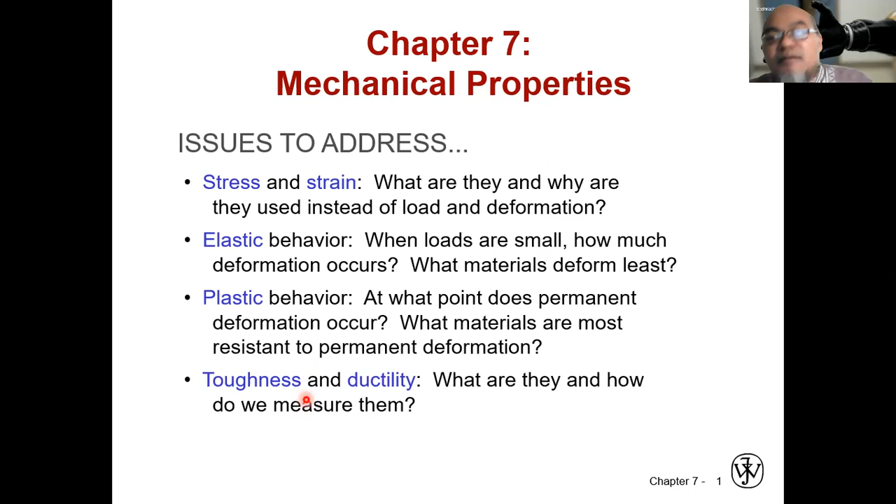What are stress and strain? Usually they are related. Why are they used instead of load and deformation of the material? Then elastic behavior of material: elasticity, or modulus of elasticity, or Young's modulus. When loads are small, how much deformation occurs? What materials will deform the least? Plastic behavior: at what point does permanent deformation occur, and what materials are most resistant to permanent deformation? Then toughness and ductility: what are they and how do we measure them? There are actually many other mechanical properties; we will discuss them one by one.

Whenever we have a material, let's say in the form of a solid bar like this, if we zoom in to a few nanometers or several angstroms, we can see how the atoms are arranged in the crystalline structure, for example a metal in its crystalline state. When we apply loading, this horizontal bar represents the bottom surface of the bar. Applying mechanical loading means we apply force to this bar, with one end fixed, either pushing it or pulling it. Pulling means elongating the bar downwards to make it stretch.

When we speak about elastic deformation, the elastic region of deformation, it means that the deformation has to be reversible. What does it mean? When we apply a stretching force, stress, to the bar, or a pushing stress, the bar will deform. Deformation means that the material will change its shape.

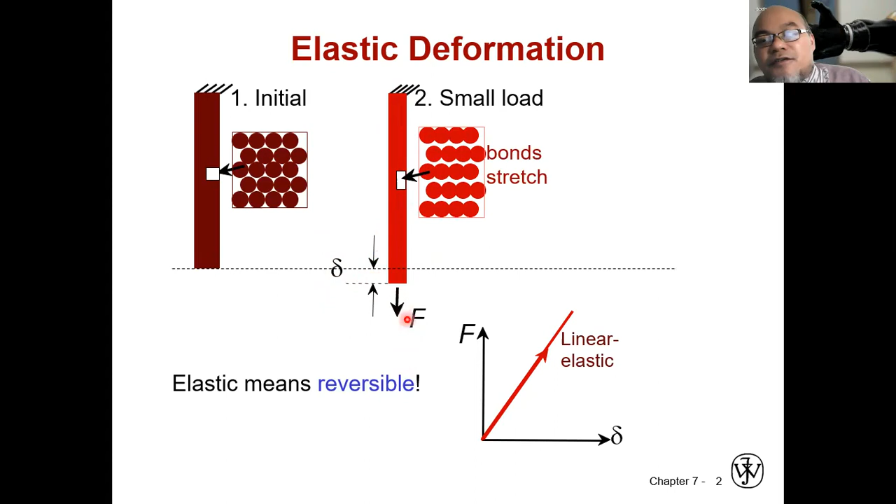So when we apply a small load like this, the bar will stretch with an elongation of delta. Delta is the extension length, with a force F. In this case, the bonds between the atoms are stretching, so there is more space between the crystalline planes, parallel or perpendicular to the force.

So here, when we draw a graph of force as a function of delta, as a function of the extension, we will have a linear elastic graph. As long as it is still in elastic deformation, the graph should be linear.

So when the force is released, the process we call unloading the force, when it is elastic deformation, the material should come back to its original shape. And so the bottom part should come back to its original initial position.

Okay, however, some materials also have nonlinear elasticity. Nonlinear elasticity means that they can still come back when they are stretched. When the force is applied to that material, they will stretch, and when the force is released, they will come back to their original condition. However, for some of these materials the curve of force versus delta is nonlinear.

Most solid materials, like crystalline state materials, like metal, usually have a linear elastic graph of force as a function of delta.

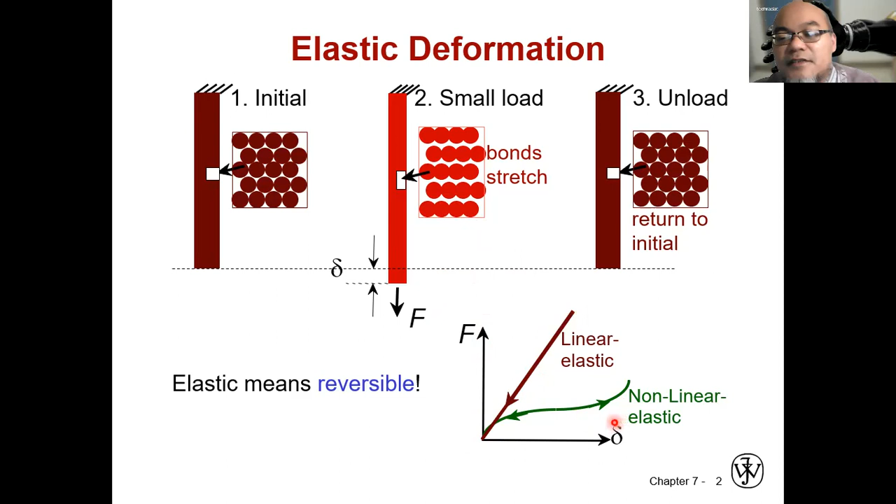Okay, then plastic deformation, on the other hand, happens when you pull that vertical bar of material above its linear region, or beyond its elastic region. Then slip will occur between the crystalline planes here. The bonds stretch, but not only stretch. Remember the stacking planes, A, B, C, A, B, C, or A, B, A, B, with face-centered cubic or hexagonal close-packed materials.

Okay, then it will shear from one plane to another. If that material is further stretched, further pulled by that force beyond its elastic deformation region, then it will not be elastic anymore. So if we further extend this material, the relationship between the force and the delta, the extension, is not linear anymore.

Then after the load force is released, that material cannot come back to its original shape. Why? While the bond stretching will be relaxed, so that the distance between the planes will decrease again, the shear between the planes still exists. This is something which is irreversible, when you have already pulled that material into the plastic region.

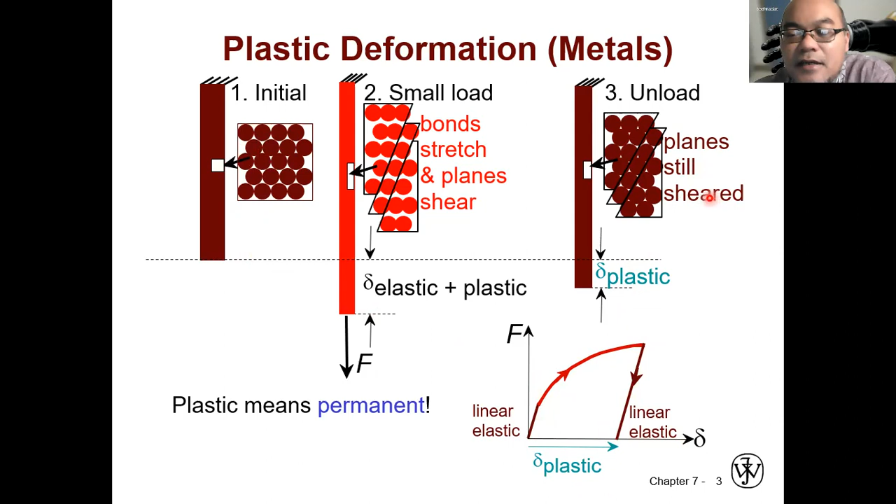So the delta is not zero as in its original initial condition. Instead, it will have this delta plastic caused by the shearing between the crystalline planes of that material.

Okay, so we are speaking about force, force loading. In material characterization, normally we don't really speak about force. What we speak about more is the stress applied to that material. Why do we speak about stress rather than force?

Because when you speak about force, let's say 5 Newton or 10 Newton, even if you apply the same force to different vertical bars, the effect will be different if one of the bars has a smaller area compared to the second bar. It means that this engineering parameter has to be normalized against the area. So mechanical scientists came up with this engineering stress parameter.

So when the material is axially pulled, the two opposite surfaces are moved away from each other with a perpendicular force Ft like this, and the cross-section area is A0, then it will endure an axial stress sigma, that can be calculated as equal to the tensile force. We call it tensile if it is pulling, making the two ends of that material move away from each other.

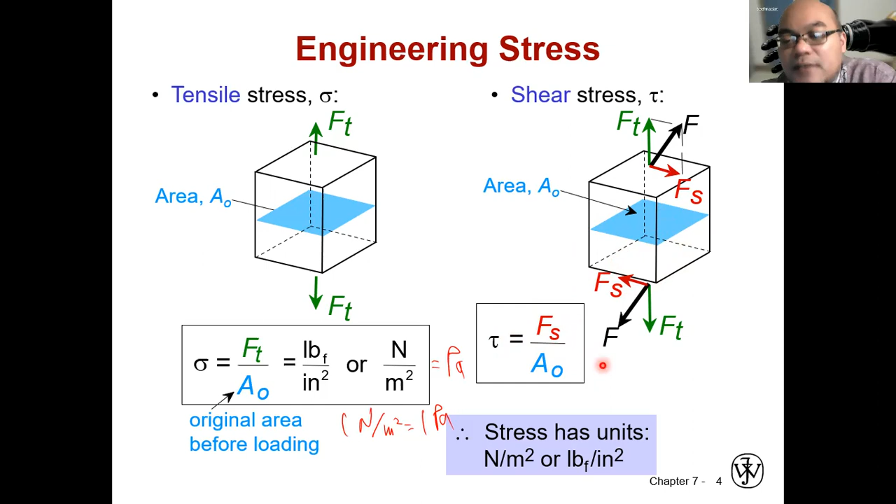So due to the existence of this Fs, we also have what we call shear stress, with the symbol tau. The tensile stress usually is symbolized as sigma, while shear stress is symbolized with tau. The formula also looks similar; the only difference is instead of Ft, tensile force, we put Fs, shear force, in the formula. So tau, the shear stress, is equal to Fs divided by A0, the original area before the loading. The unit is also the same, Newton per square meter or pound per square inch.

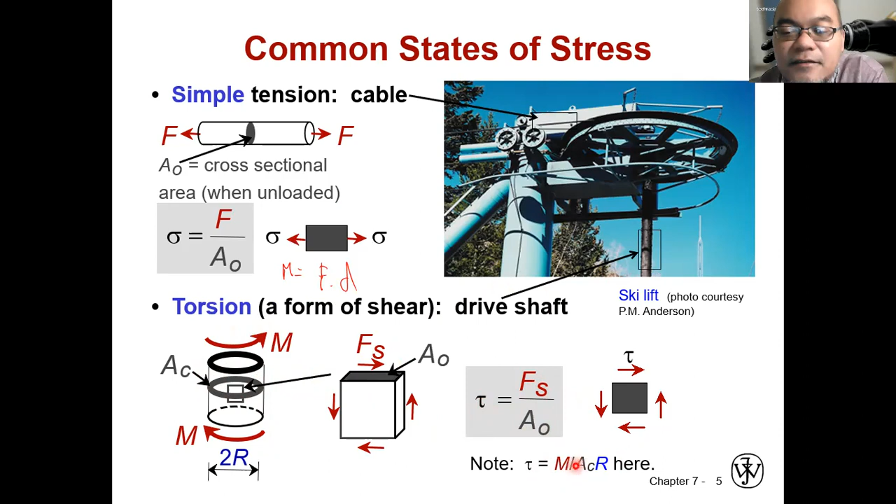So here the d is the r, the radius from the center of this shaft, the drive shaft, to the edge, to the circumference of the drive shaft. So Fs is replaced by M divided by r. So here then tau will be equal to M, the moment, divided by AC. AC here is the circumference area, divided by r, the radius. Okay.

So stress occurs everywhere. For example, here we have a balanced rock, this is in Arches National Park, I think in the US, but we also have many rocks here, in Borobudur temple, for example. When rocks are placed on top of each other, the rock in the middle will be in compression, because the weight of the rock above it will push it downward, while the rock below it will have a normal reaction force pushing it upward. So that rock in the middle will be in a compression state.

Similarly here with an arch, in an arch bridge. This arch usually functions to hold the weight of this bridge and the load above it, the cars, etc. This arch is located between the two edges of, for example, a river or cliff, and it means it is under compression as well, being compressed by the forces at the two ends, from the cliff or from the river banks. So this is also a compressive structure.

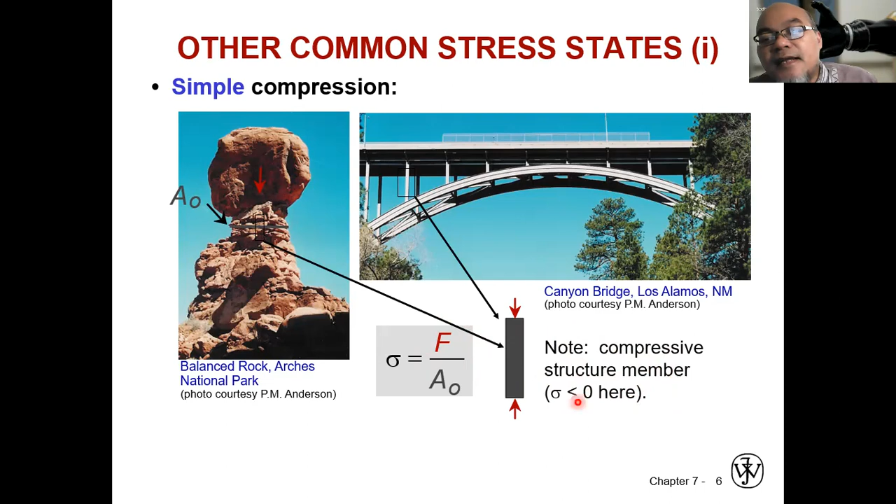The formula for compressive stress is basically the same as tensile stress. However, usually the sign is negative because in compression, the direction of the forces at the two ends is towards the inward of that material. That's why sigma is less than zero, negative.

This is another example, a pressurized tank. Also in your house, maybe you have LPG, liquefied petroleum gas. The gas inside is under compression, being compressed, right? So that much more gas can be preserved within a small volume of tank. It has to be a pressurized tank. The gas inside is basically trying to push the wall of the tank, while the wall of this tank is actually compressing the gas inside.

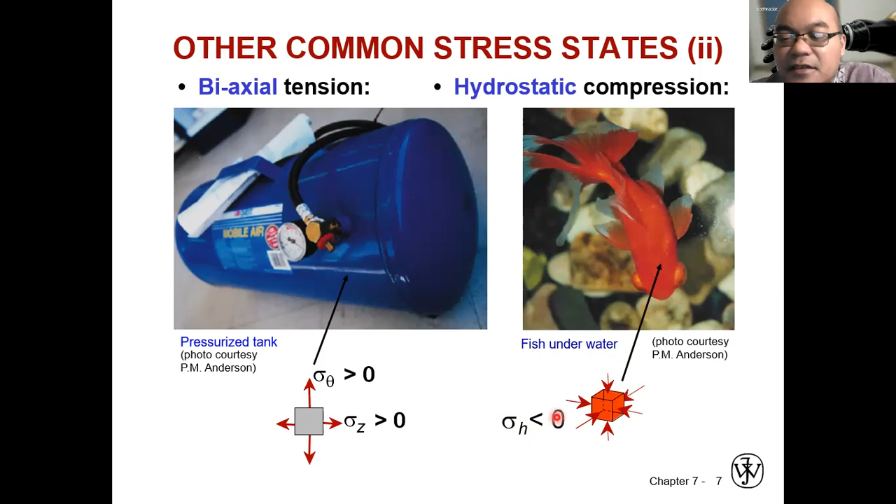Similarly, when you are swimming, or like this fish swimming inside water, the water pressure is also compressing your body, compressing this fish's body. That is what we call hydrostatic pressure, hydrostatic compression, which is basically proportional to the depth of the water. So when you dive deeper and deeper, for example in the pool, you will feel that pressure bigger, especially when you don't cover your ear, you feel the hydrostatic pressure on your eardrum, and it is more painful. So that's why such a fish has to endure hydrostatic compression, sigma h less than zero, because it is a compression force.

So what is meant now by strain? Strain is actually related to stress. The relationship is given by a constant called Young's modulus. While stress is directly related to force, stress equals the force divided by the cross-section area. Strain, on the other hand, is related to length.

The effect of a stress given to a material, meaning how much deformation occurs, is related not only to that force alone, but also to the initial length of that material. So rather than expressing the deformation as an absolute length change, delta, we express it as a ratio between the length extension delta and the initial length L0. So this is the definition of strain. Strain, epsilon, is defined as delta, the extension, in any length unit, centimeter, meter, whatever, divided by the original length.

So when we apply tensile stress, the material will undergo a tensile strain. It means it will elongate along the same axis and in the same direction as the tensile force or the tensile stress.

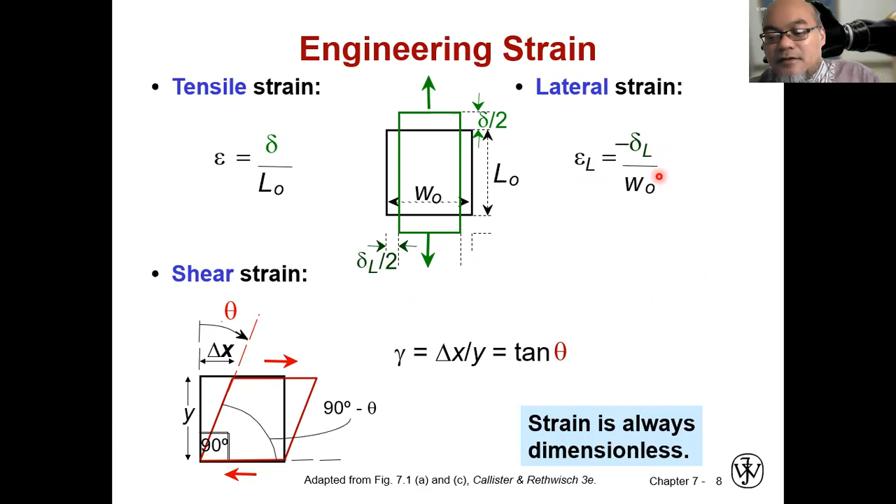So this is what will occur when a specimen is being pulled in a tensile test. It will extend in length in the direction of the force. However, in the direction perpendicular to the force, it will contract; the width will decrease. This is what we call lateral strain. Lateral strain epsilon L equals minus the width change over the original width.

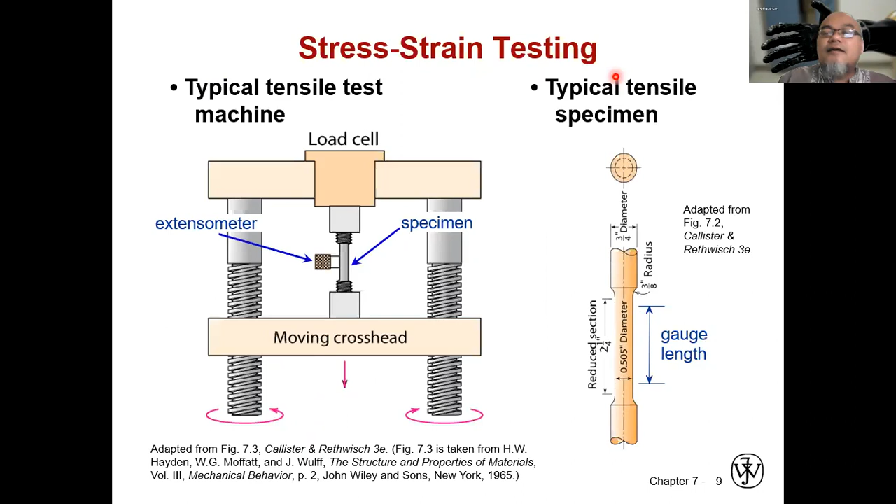So the axial strain, the strain that occurs in the direction of the tensile force, and the lateral strain, the strain in the direction perpendicular to the force, are related through a constant called the Poisson ratio. This is also a material property specific to a certain type of material, so different materials have different Poisson ratios. The Poisson ratio, nu, a Greek letter, equals minus epsilon L over epsilon. Why minus?

Because, as we have mentioned, the lateral strain follows the opposite trend compared to the axial strain. When the tensile strain, the strain in the same direction as the tensile stress, is positive, meaning it is being stretched, the lateral strain will become negative, because it is being compressed in the perpendicular direction. That's why we put a negative sign here.

So for metals, nu is about 0.33. Ceramic is 0.25, which means ceramic is harder to deform compared to metals. Polymers have a larger nu, because it is easier to deform: when you stretch a polymer, the perpendicular direction will deform more compared to metals or ceramics.

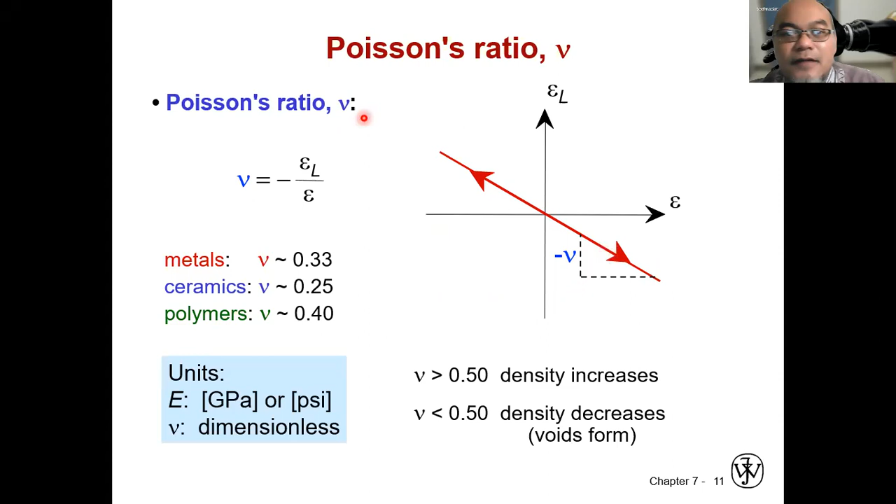Okay, so let's stop here for this.